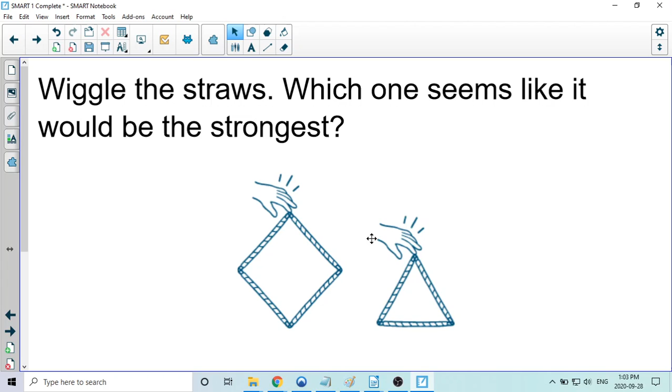So triangles are the strongest two-dimensional shape that you can use for building a structure. All right, that is what that is meant to illustrate. Yes, so it resists internal and external forces. So things like compression, as well as somebody pushing on it with an external force, compression and internal force, things like this, which is why you'll often see inside buildings, if you look at the framing, you'll see a lot of triangles.

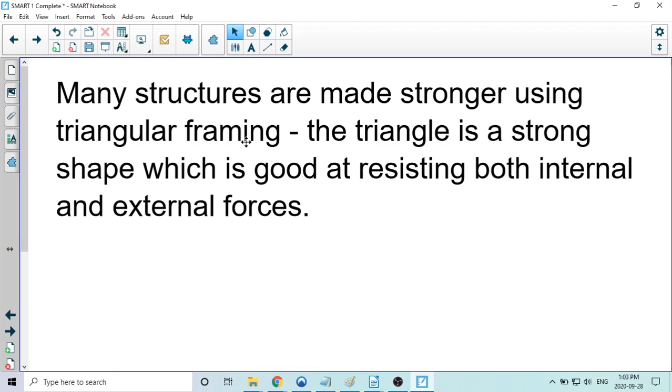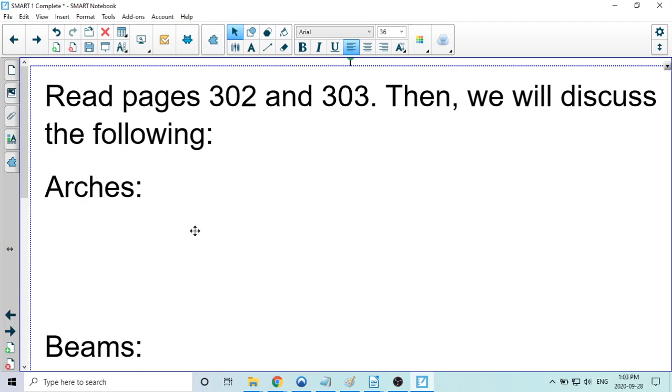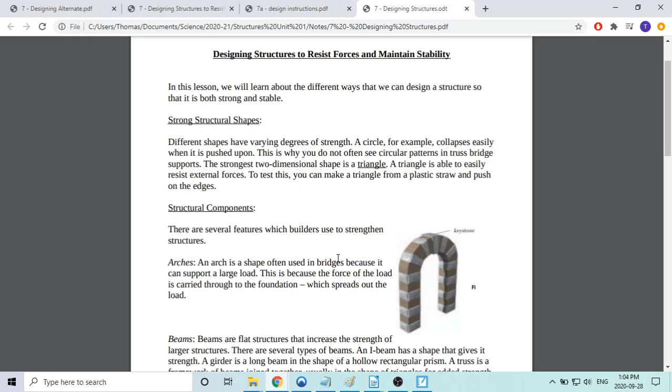Okay, so normally if you were in the classroom, we would be going through pages 302 and 303 and then discussing what was here. But unfortunately, we're not in the classroom. So I have gone out of my way in our note here to talk about these components. All right? So I'm going to read through this with you and talk about it as we go. Okay? So go into your book, your package, pull out this note, and I will read it along with you. Okay? Pause now if you have to. Okay. So,

there are several features which builders use to strengthen structures. So first here we have an arch. An arch is a shape often used in bridges because it can support a large load. This is because the force of the load is carried through to the foundation, which spreads out the load.

So basically, the bridge would be up here, the load, so the force from everything going across the bridge, pushes down here, and then it gets transferred all the way down the legs of the arch into the ground. The ground's pretty big, so any loads up here get spread out across the entire ground, which makes the bridge less likely to collapse.

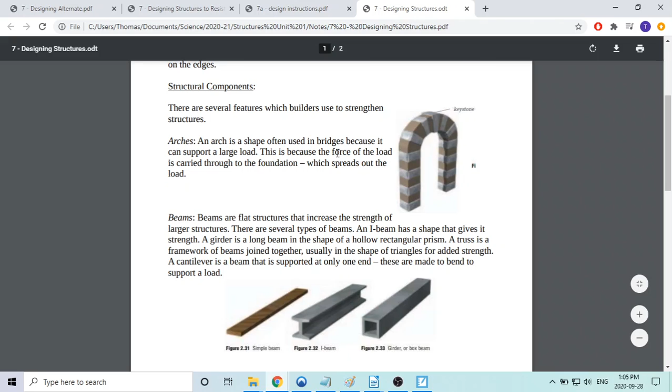Beams are flat structures that increase the strength of larger structures. Beams are used for reinforcement. So this is what a simple beam looks like, just a rectangle of some material. This one is wood, it could be steel. So that's a simple beam. There are several types of beams.

An I-beam has a shape that gives it strength. So this is an I-beam. You can see it's shaped like an I. The shape of it, this piece between the top and the bottom, is what gives it the extra reinforcement, so it doesn't collapse as easily or break as easily under a force. A girder is a long beam in the shape of a hollow rectangular prism, so that's like this guy.

All right. A truss is a framework of beams joined together, usually in the shape of triangles for added strength, right? Like we would see in a truss bridge. Remember, again, we use triangles to make it stronger. This is our truss. All right.

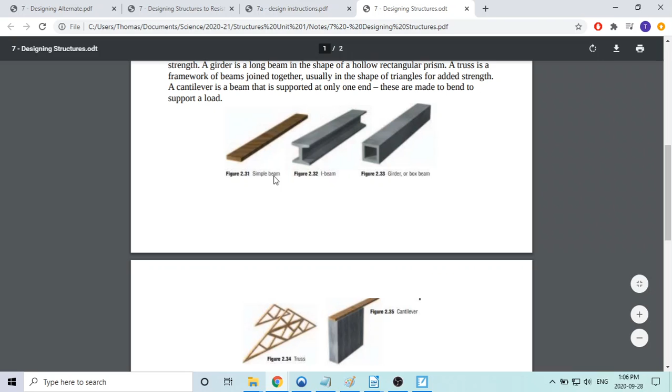A cantilever is a beam that's supported at only one end, and these are made to bend to support a load. So this is a cantilever. See, it's supported at one end. You could put a load here and it would bend to help support.

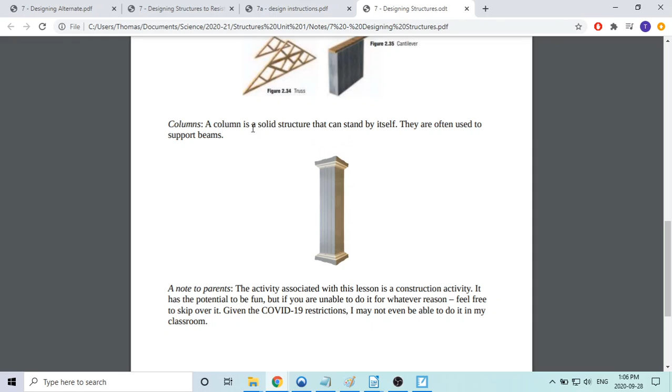All right, a column is a solid structure that can stand by itself. These are used to support beams, right? And this is what a column looks like. So your beams would be run over top of it.

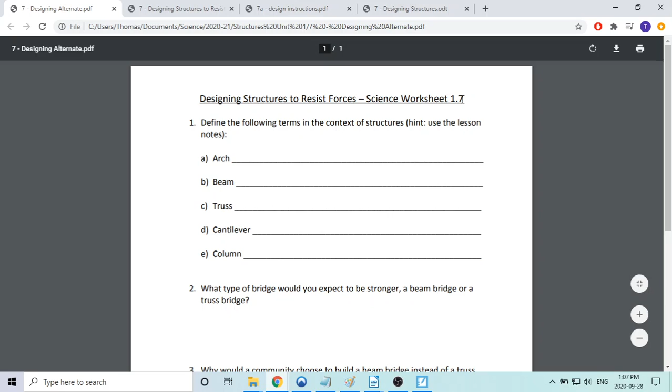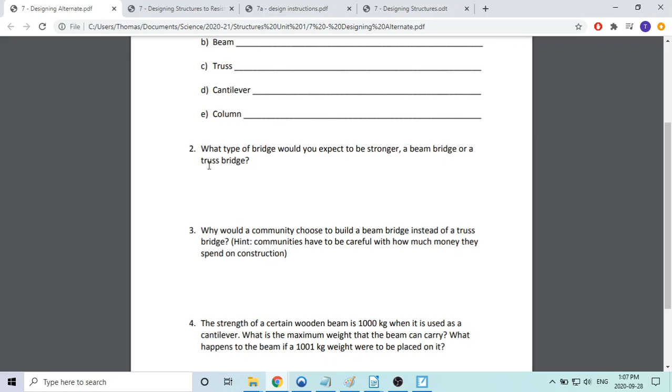Okay? Your tasks for today. You have to do this one. This one says designing structures to resist forces, worksheet 1.7. So I want you to tell me what an arch is, what a beam is, what a truss is, what a cantilever is, and what a column is. Tell me which of these two, a beam bridge or a truss bridge, which one you would expect to be stronger. You can tell me why too, that would be great.

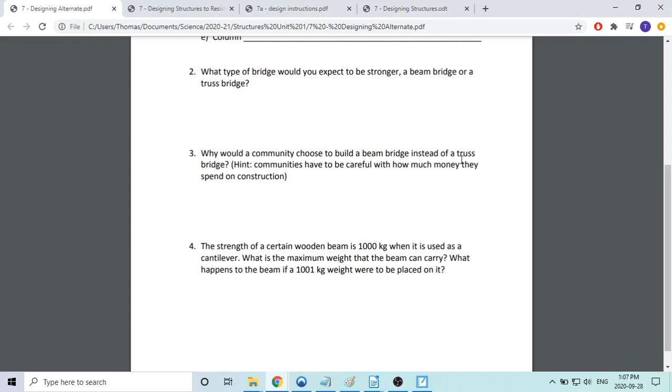You can say, why might you use a beam bridge instead of a truss bridge? There's a little hint here. And this question is, the strength of a certain wooden beam is 1,000 kilograms when it's used as a cantilever, right? What's the maximum weight that it can carry? Well, if the strength is 1,000 kilograms, I'm sure you can figure out what the maximum weight is. And then I want you to tell me what would happen to it if 1,001, so 1 kilogram more weight were to be placed on it.

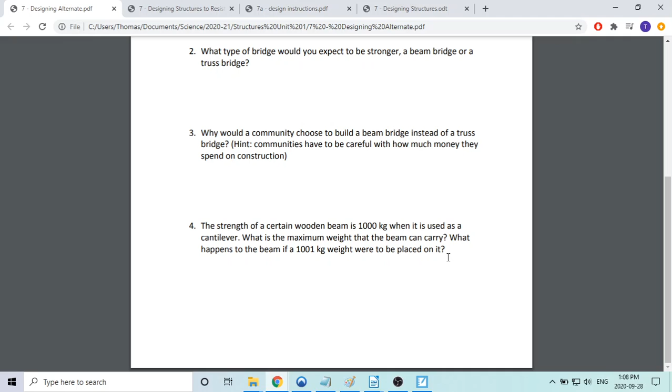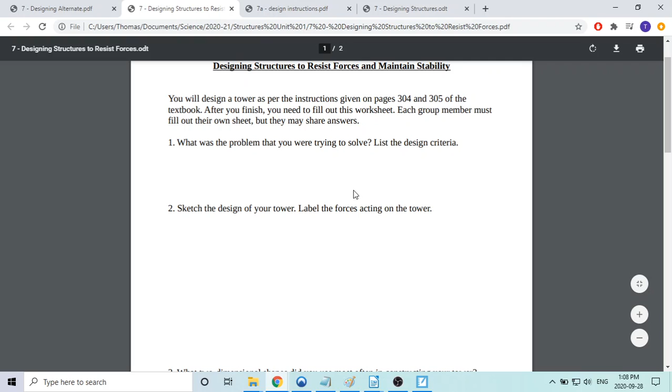Okay? Now, there is also, you will find in your package, this activity about tower design. Okay? And there are instructions for it also attached. They start with the tallest tower. I don't expect you to do this. Okay? I would even go so far as to say, do not do this. Unless you have some of these things. If you have some of these things and you want to just do it for fun or for your own understanding, that's fine. But I'm not actually expecting you to do this. I just included it in case someone was interested. Okay? That's all there is to it.

So this is the last of this first science unit. Our next unit will be a social studies unit. Okay? And then once that's done, we'll come back to another science unit. All right? But this is the end of our first science unit. Okay? So once you get it all done, bring it in to be handed in.